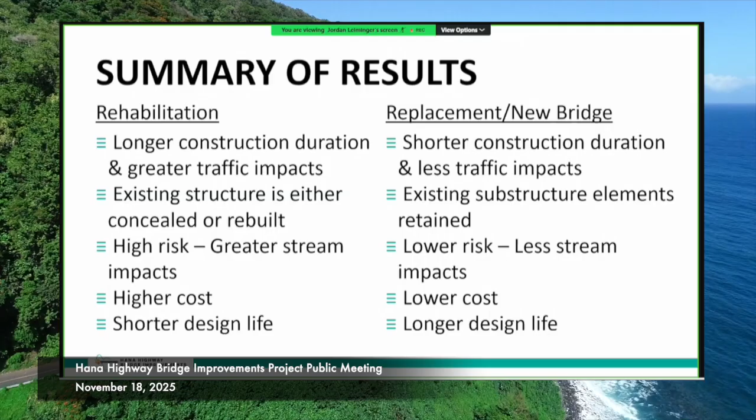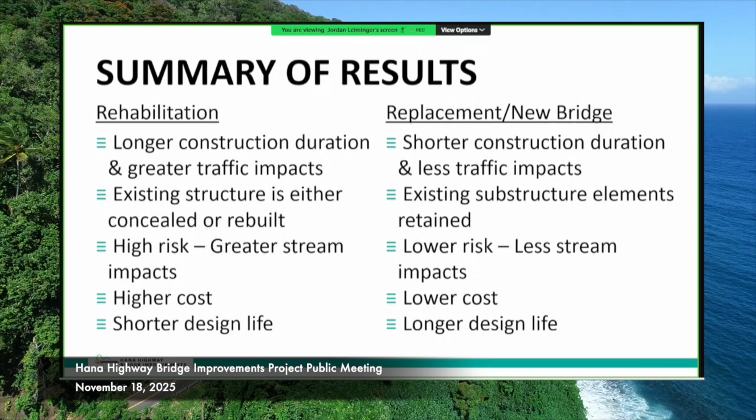Our summary of results after looking into both rehab and replacement: when we looked into rehabilitation, we found that the construction duration would be longer, the traffic impacts would be greater, the existing structure is either concealed or rebuilt, there's high risk with rehabilitation, and a shorter design life. We're trying to achieve a 75+ year design life for these bridges. So we looked at replacing the bridges instead, which allows us to keep more of the historic structure, the piers underneath and the abutments, at lower cost, lower risk, and lower impact to roadway users.

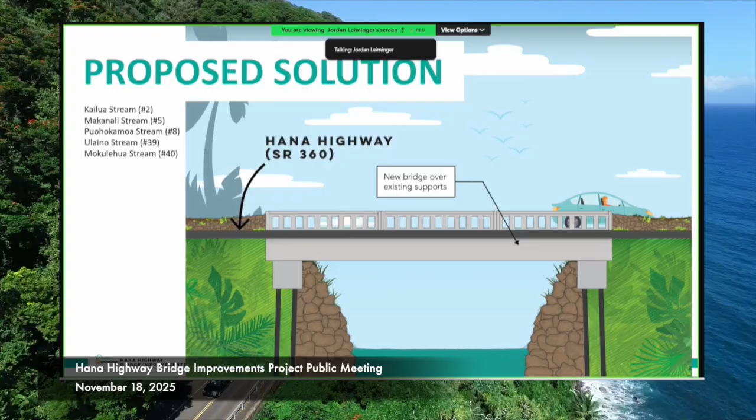I'll hand it over to Darren in a moment, but overarching our proposed solution, this is a good example of what several of our bridges look like that we're proposing. These are the CRM existing abutments and railings, and we're going to keep these similar features and just build our bridge behind them. I'll let Darren get into the design approach.

Thanks, Jordan. I'll go bridge by bridge here. I want to clarify, we spent years going over exhaustively the rehabilitation options, trying to figure out ways to keep these existing structures and somehow strengthen them up to current requirements.

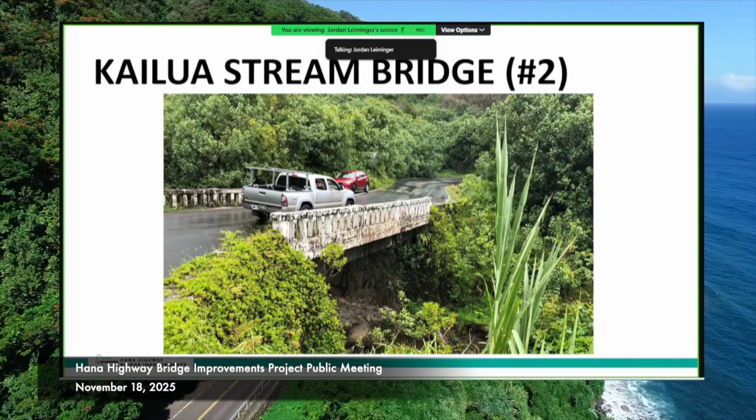Obviously those types of treatments probably aren't the best looking, and there are technical constraints in terms of cost—it's very painstaking work to implement those features. We also identified reconstruction of the abutment, because when you put a modern load on, the abutments couldn't hold that additional weight required. So we were looking at how to rebuild the foundations of the bridge anyway.

As Jordan alluded to, looking at the replacement alternatives basically checks all the boxes and requirements. We get the width of the bridge we want, a new modern railing that looks similar but is much stronger and satisfies current code requirements, and we can essentially abandon the weight on these two abutments, bridge over them, and put new foundations behind each of the new abutments. When we really thought about it, this is a lot cleaner solution than trying to painstakingly patch together the existing bridges.

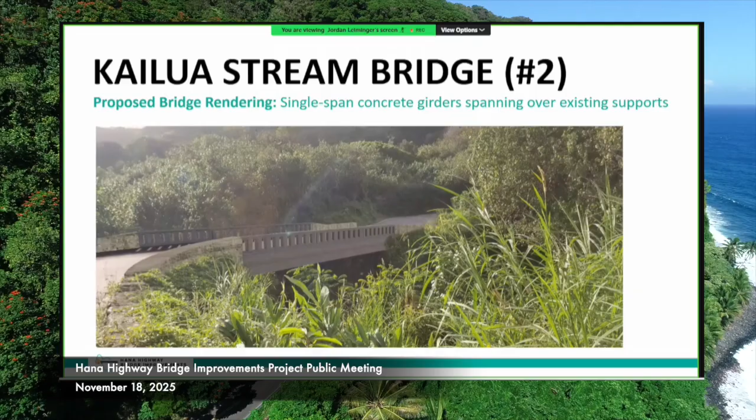Next slide. So the second bridge is the Makanali Stream Bridge, bridge number 5. The unique thing about this is it's the shortest bridge on the project—only 25 feet long.

How's it going? Okay, thank you. I appreciate it.

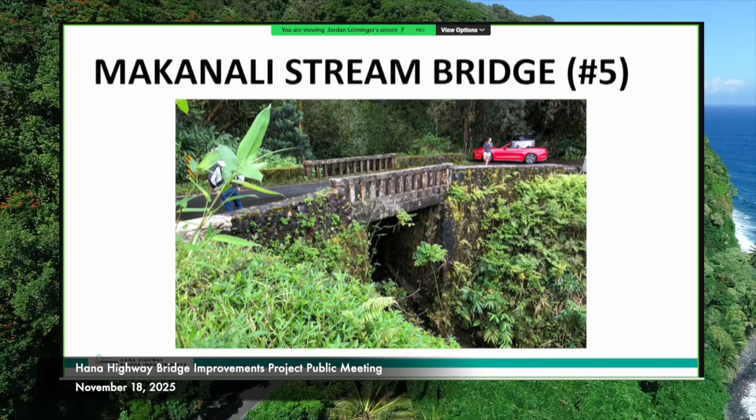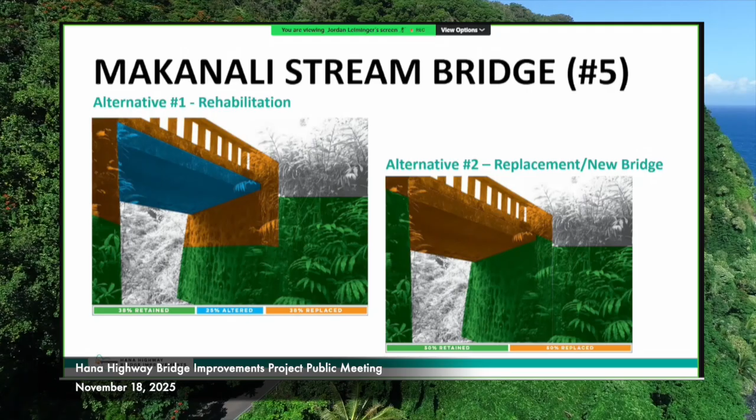So go on to the next one. Puohokamoa stream bridge. What did I do there? Okay, so this one's unique.

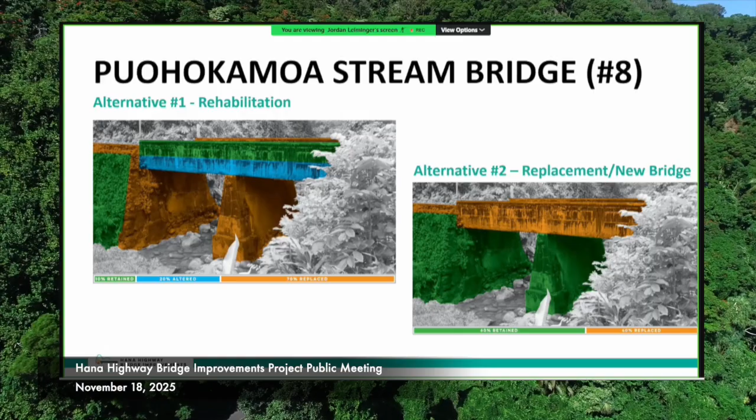Next slide. So Ulaino Stream Bridge, number 39. Is that correct? No, it's not Ulaino. What is it? That's ours, the last bridge, 40. Oh, it is? You're 40? Okay, we'll get to that one. The Ulaino Bridge 39, that's not it. That's 40. That's it, that's Ulaino. No, but what is the bridge called then? Because you live there. Makula? Is it Makula? What names? We call it... Yeah, okay, so they have it. So we're calling this Bridge 39 for now, and we'll talk.

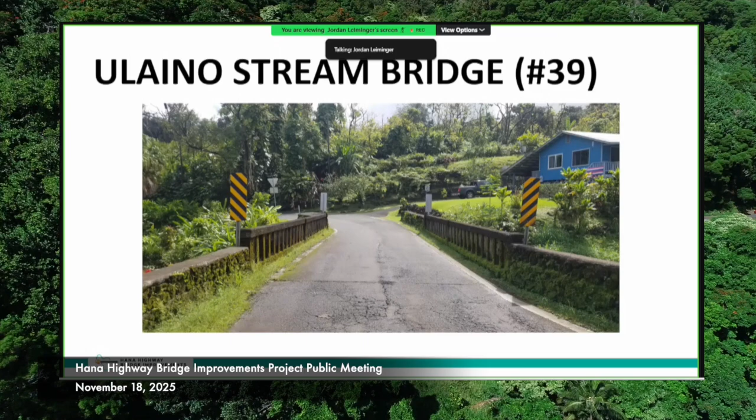You'll see a little more detail here. Let's go ahead and flip to the next slide. So here's the elevation view. Two-span bridge, historic picket railing. It's got this pier right here. For the rehabilitation options, we were even showing that this pier would have to be removed or replaced.

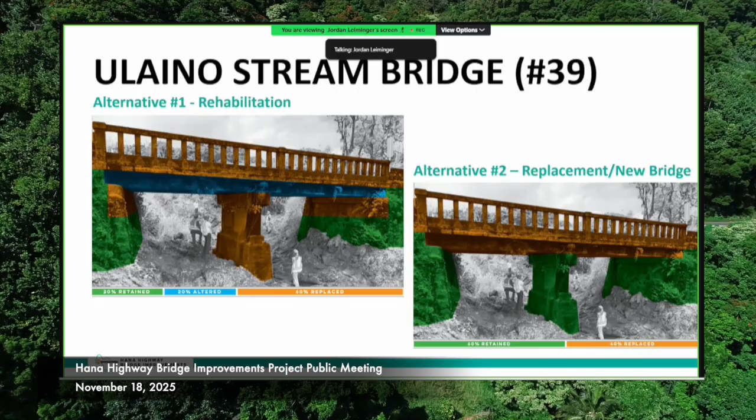So with the replacement option, again, we're just spanning over everything. The abutments remain in place. New superstructure. Go ahead and go to the next slide. So here's the rendering of what that would look like, extremely similar to the existing bridge.

Any questions on this? We'll just keep going here at 40. There's a little anticipation built up here. Mokulehua. Oh, maybe it's switched around then. Yeah, okay, we'll get that.

So Bridge 40, and there is a residence right over here. So this is the interesting thing about this. This is the oldest bridge on the entire corridor. This original bridge was built in 1908.

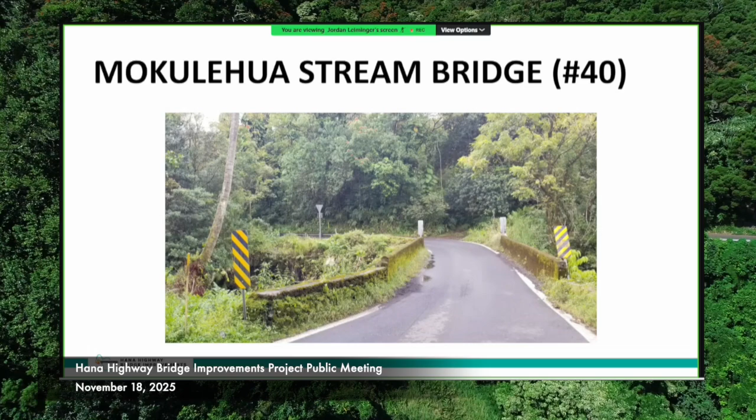If you go to the next slide, you'll see it's actually three spans. It's got these existing concrete piers, very short spans. Again, very difficult rehabilitation. Our new bridge is going to be a concrete slab that spans over these, and we're going to keep all these elements in place and just bridge right over them.

If we go to the rendering, again, very similar to existing, but it's still going to be a one-lane bridge. And yeah, so I think that's it. If we go to the next slide, I think we're okay, so this one.

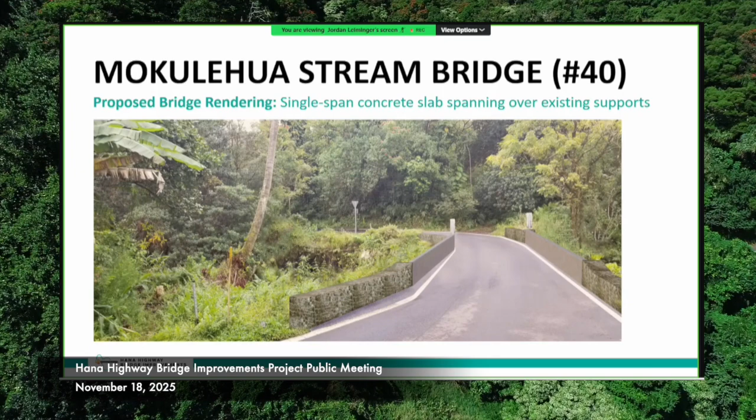This is one of the most unique sites on the whole corridor, Kopiliula Stream, it's Bridge 19. This is the one location where we're actually going to keep this existing structure exactly as is. We're not actually going to do anything to this bridge. The main reasons driving this are the historic irrigation fixtures attached to the bridge, and the historic weir structures upstream of the bridge, and those defining characteristics kind of outweighed replacing in place.

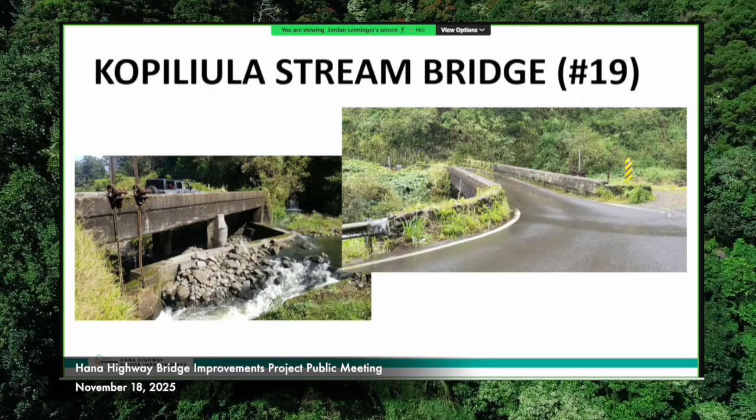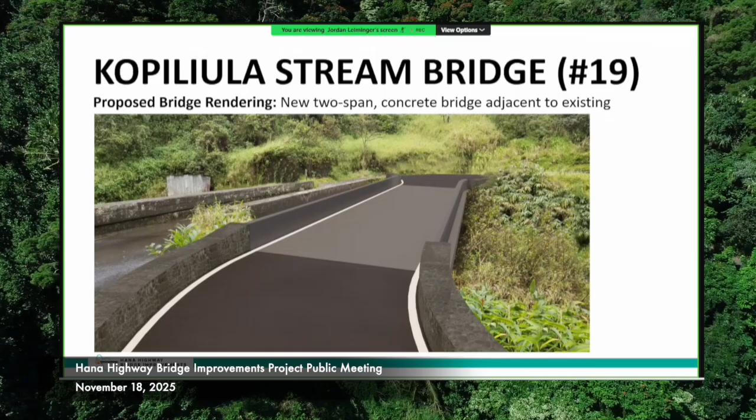Okay, I think Jordan. Yeah, thank you. All right, so now that everyone kind of saw what we're going to be doing for each of the bridges, I'm going to talk a little about the constructability and the traffic control and methods that we're looking at using. We definitely had a lot of considerations that we heard from everyone over our last public meetings.

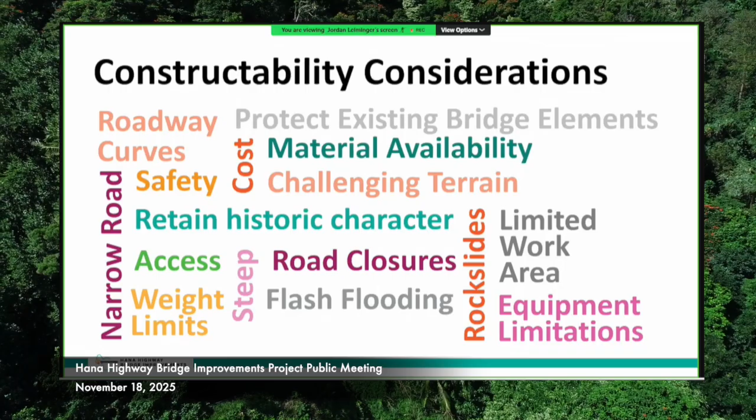Some of the big challenges are road closures, challenging terrain, narrow road limitations, retaining historic character, and weight limits and other factors we had to consider when looking at how we were going to construct these bridges.

We really wanted to make sure we have the least amount of impact to all roadway users across Hana Highway. So we initially looked at a bypass bridge, sometimes called an Acrow bridge. These are used as temporary alternatives to driving on the bridge while they're working on it, with the bypass adjacent to it.

However, when we started looking at this, we realized this isn't the best option, as it impacts users for many months to potentially many years, and it actually has a really big risk to private landowners and property owners. So we eliminated this and went toward a different accelerated bridge construction alternative.

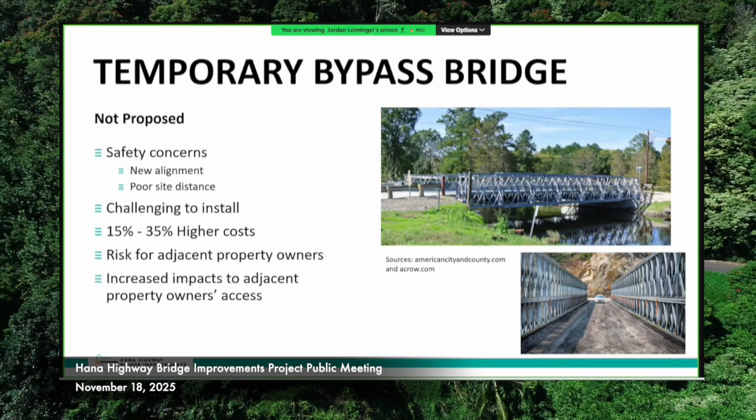Here you'll see a representation of a bridge slide, or lateral bridge slide, another word for it. These are called accelerated bridge construction techniques. This allows us to build a bridge adjacent to the existing bridge. In our case, it's going to be built downstream of 4 of the 6 bridges, and we will slide it into place over a closure window.

This allows us to have the least amount of impact to all users, as we can just have one continuous closure, and those continuous closures are going to be up to 84 hours at 5 of the 6 bridge sites. There are incentives for the contractor to finish faster than 84 hours, which we hope to see, but we do want to plan for the worst case scenario.

So it would be from 6 p.m. on Thursday evening until Monday at 6 a.m. That would happen 5 times over approximately a 3-year period.

There are also going to be plans for some overnight closures. Those happen at each bridge location and would also be communicated like a closure, but those would only be a shorter duration during the evening.

All of these types of closures are going to have to be communicated regularly with everyone. Every user of Hana Highway, it will be our role to campaign out that message through email, texting, and the project website, which the contractor doing this work will have to maintain every day. A 14-day notice minimum is required to be sent out to everyone for these closures.

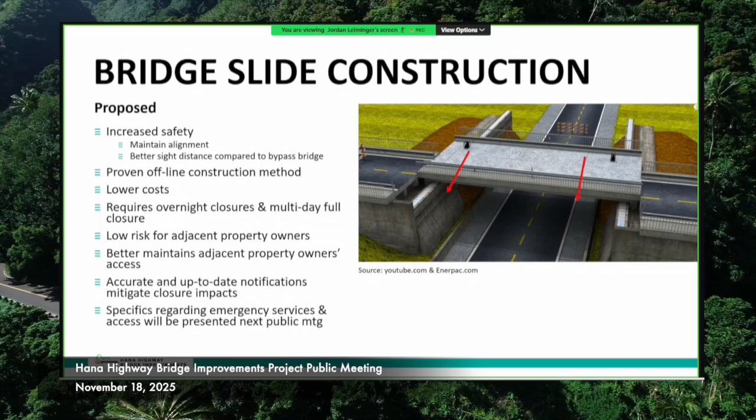I'll let Darren go into what that's going to look like with that closure window, and how we can push through and get an entire bridge in place in 84 hours with the lateral bridge slide.

I just wanted to highlight the 84-hour window for the lateral bridge slide. It's a very aggressive construction technique, and it's actually very rarely used, just because it's so aggressive. Generally, contractors don't like to go really fast, so it's kind of a premium to make the contractor go very fast and do a lot of work in a small amount of time. But as Jordan mentioned, 4 of the bridge sites are going to have this lateral bridge slide technique.

I'll just step everybody through what that's going to look like. The initial work is that when the contractor arrives at the site, some of the first things you'll start seeing at each site is a traffic diversion barrier, pushing traffic over to the far side of the road. Then you'll see the contractor coming in and staging these work areas, with some clearing and maybe some minor rock work to get everything set. These are going to be the work areas that the contractor will be working in.

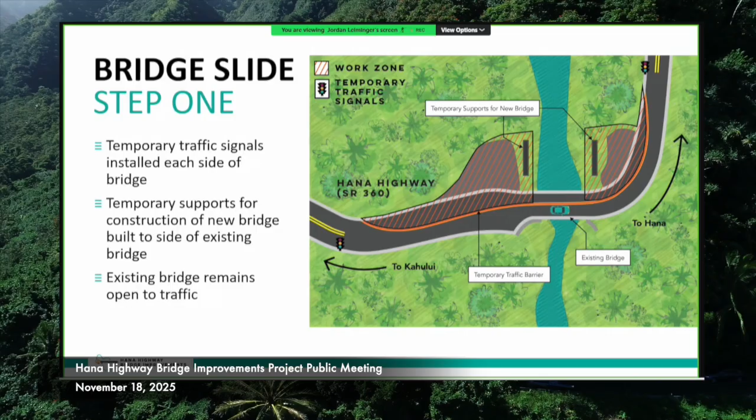When the road is open to traffic, traffic will be able to flow through here. We've got some temporary signals here. The contractor will be able to work behind these barriers during the day.

Next slide. So step two of this bridge slide process: you'll start seeing a bridge being constructed off to the side. It'll be kind of strange looking, but it'll just be a brand new bridge being built off to the side of the bridge site.

While this is happening, these orange rectangles represent construction taking place during nighttime closures. This method is called cut and cover. The contractor can go in when the road is closed and cut a trench into the roadway to construct the future foundations for the new bridge.

When the closure is over in the morning, the contractor will cover these excavations with structural lids that cars will actually be able to drive over. So we can reopen the roadway to traffic, they'll drive over these covers, and the construction will be underneath. Then when the next nighttime closure happens, the contractor removes the covers and continues working.

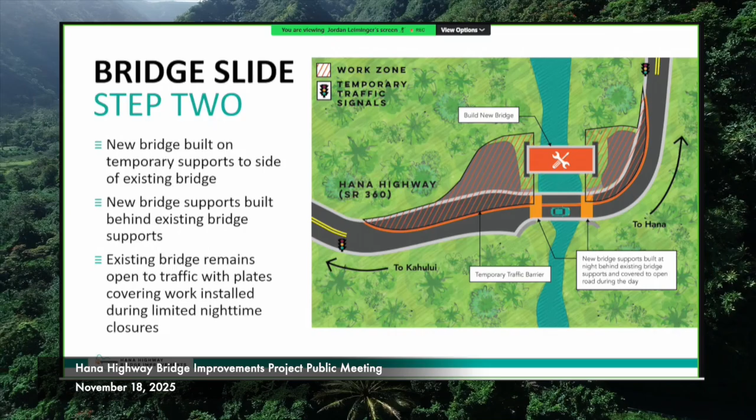Next slide, please. So you can see the hatching now, the temporary barrier is gone, and now the whole site is hatched. This represents the beginning of the full closure, that 84-hour closure that Jordan was referring to. The first step is the contractor is going to demo the existing bridge.

It's going to be done in a very careful fashion with netting to prevent any debris from going into the streams. That's a very important point that we're going to have the contractor do. Once the bridge is demoed, we basically expose the proposed new abutments here.

It's not actually shown here, but there's a trackway that the bridge is going to slide on. I think that first slide showed the trackway. The trackway connects up to the abutments, and then the actual bridge slide happens within the 84-hour full closure.

The actual slide itself should only take 2 to 3 hours. It doesn't take very long. Everything leading up to it is what really takes a long time.

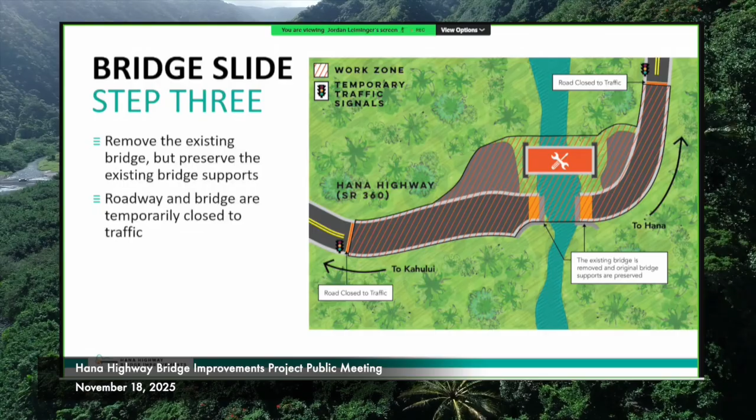So we go to the next slide. The bridge gets slid into place, and then hydraulic jacks lower it down onto its final bearing locations. Once it's set down on the bearings, that's the final position of the bridge. It's set in place. Then the contractor can come in and backfill behind these abutments, bring up the subgrade.

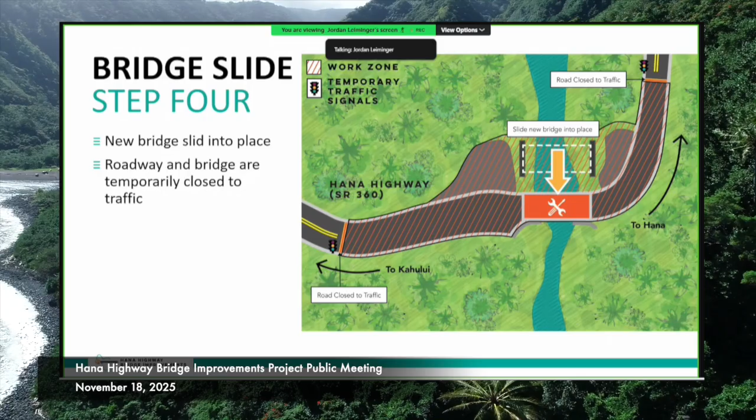Bring up the subgrade to basically just below the pavement elevation, put the final pavement in, approach slabs, and then we go to the next slide.

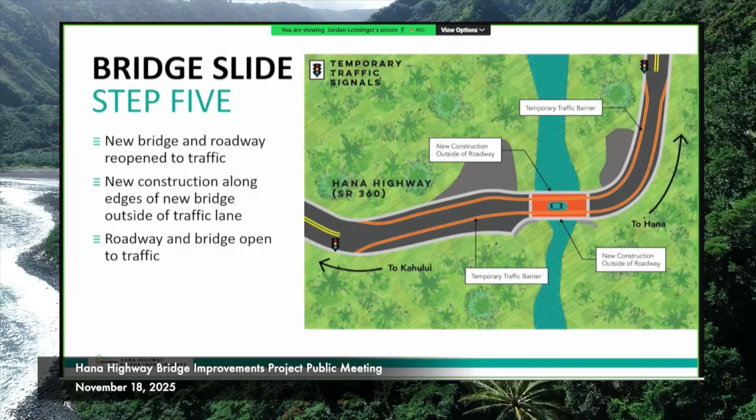He doesn't have to get all of the work done in the full closure. Some of the approach barrier work, we expect that to happen outside of the full closures. But what we can do once the full closure is lifted is put temporary barriers in that keep us safe. Then traffic can proceed to drive on the brand new bridge with temporary barriers in place.

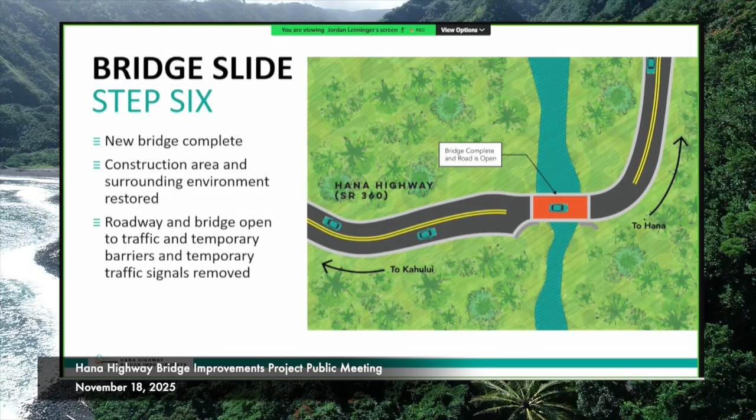And then the final slide: temporary barriers are gone, the new approach guardrails are installed, and the contractor is going to restore the work areas he is working in. This would represent the completed, finished project.

I think that's it. Right, and Tom, you talk schedule? So, over the next couple of months, we're anticipating finishing up the design phase of this project. We're hoping to wrap it up by February of next year, 2026.

We are looking at advertising the project for bids in the spring of 2026. That is pending the acquisition of the temporary construction easements required for construction of this project and obtaining the approvals on the environmental permits that we are currently working on obtaining.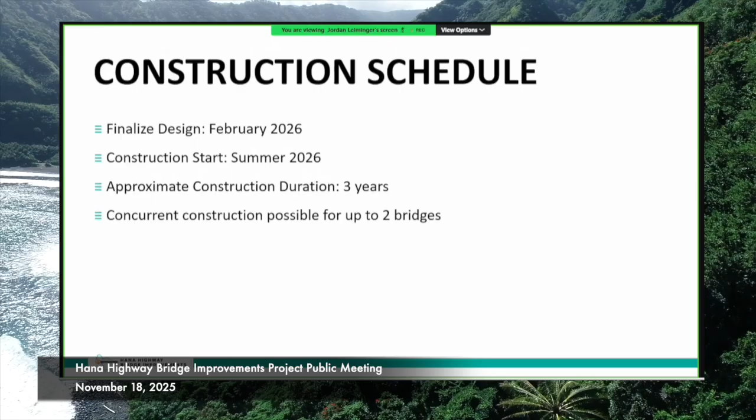We are anticipating construction of this project taking about 3 years. With 6 bridges and the location of those bridges along Hana Highway, we're anticipating that the contractor will be able to build 2 bridges per year for the total construction of 3 years.

Now, I just want to make sure that everybody's aware of this. This is our estimate, and that's how we develop our contract. But it will be up to the contractor to really suggest the methods that they're planning on using and the proposed construction schedule that will be submitted to us for our review and approval.

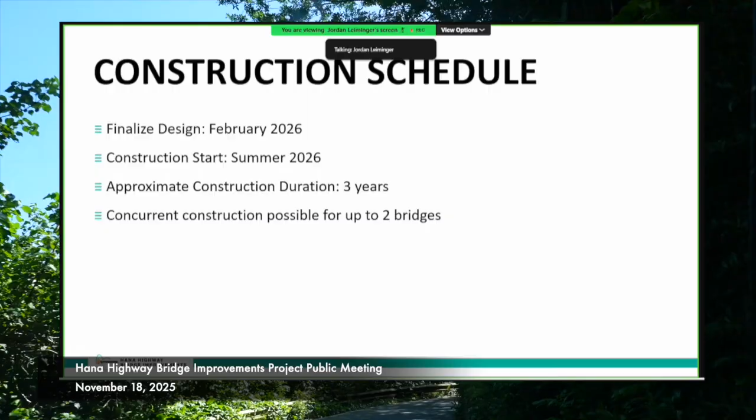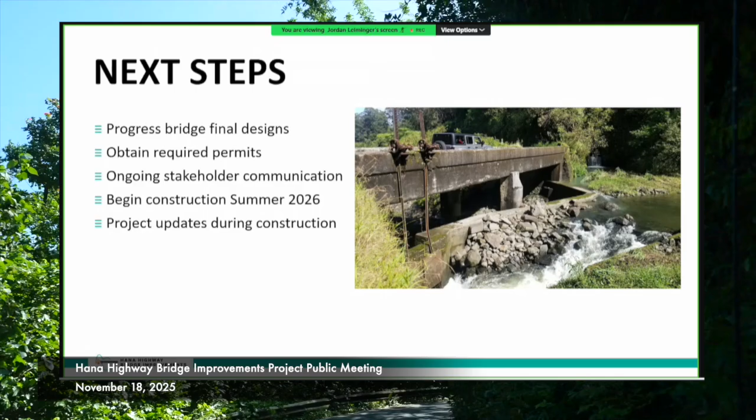Next slide, please. So a couple of next steps: like I mentioned, over the next couple of months we'll be wrapping up the design phase, preparing the procurement documentation in an effort to get this project advertised and under construction in the summer of 2026. A couple of important messages that we want to deliver to you and make sure that we have your engagement as this project is going into construction. Next slide, please.

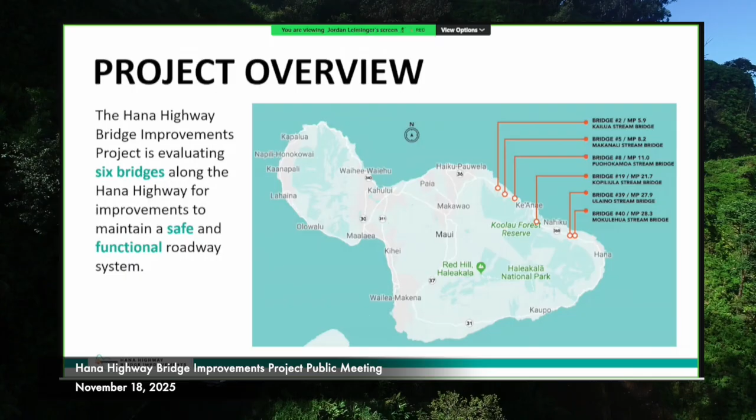One of the problems is it's one-lane roads in both directions, and regularly tourists especially refuse to yield, so there's major traffic jams, especially if you get a big truck. So for the stoplight here, it's going to have to be about a quarter mile.

And this curve is a little softer now, so hopefully that creates a bit more space there, because the barrier will be here blocking off this bridge. We're not changing that line. Would you still be able to walk across the whole bridge? Yeah, correct, that's encouraged.

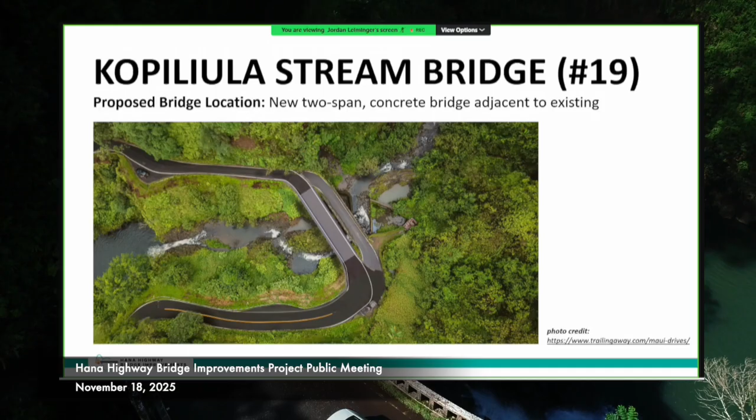I'm glad you're looking at not just the typical contract to get federal money. Last time they made it a millennium trail and we got a lot of federal money, but a lot of the pullouts that used to let traffic move through got covered up because they were required to put steel barriers there, covering those pullouts. And their signs, a forest of signs - where you used to have a yield sign for the person at both ends of the bridge, which is totally confusing. So I'm glad you're looking at this, given what federal highway requires for the state of Hawaii.

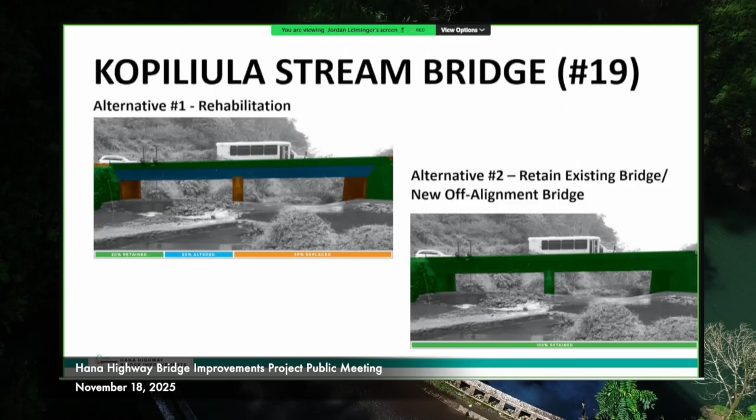Trying to match a couple things, or answer your question, Matt? Sure, and we can chat more in detail after this Q&A. But long story short, we're trying to retain those features.

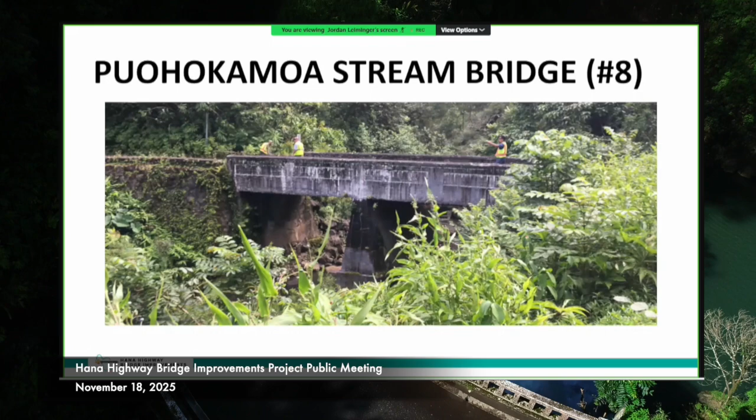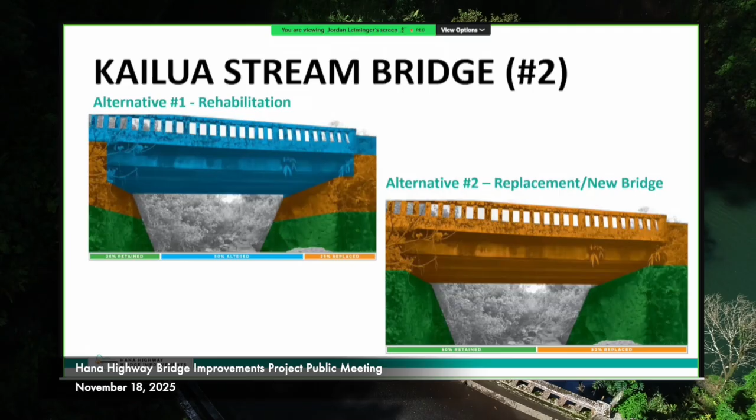But when you mention the word replacement, that's a whole different category than restoration or reconstruction. Absolutely, yes, so you do have different standards for Secretary of the Interior's Standards rehabilitation and preservation. What we're doing, I would say, is rehabilitation, although it's not exactly one-for-one with bridges. We're replacing parts of it with in-kind materials and trying to stay with a similar design. So the railings, we're trying on each individual bridge, since different bridges have different railing details, to keep that on the replacement structure, but then also retaining things like the rock wall abutments, the rock wall approaches, and barriers, so that it still has the same continuity with the rest of the building.

Is this the same bridges we went over maybe six years ago? Probably, yes, I think these were the same bridges we worked with for a while. They went over all these things, so it required community input. This is the fourth public meeting, because you guys kept coming for a while. So we were taking on public comments about how we could treat this, how we could make the closure time shorter, things like that.

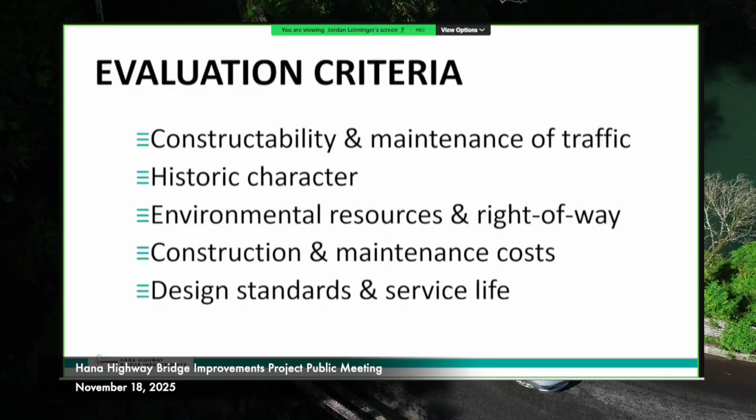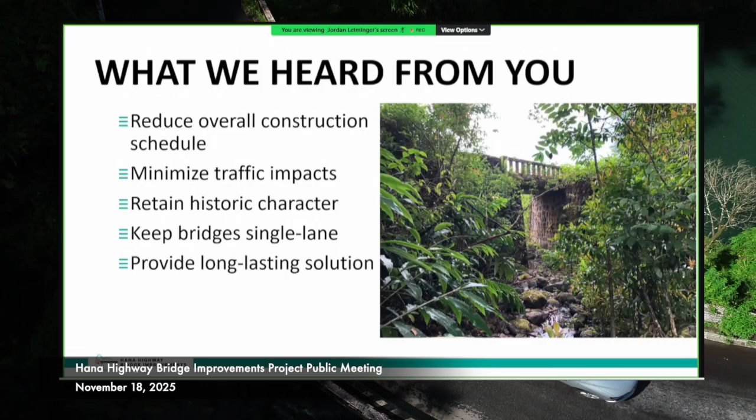I'm just asking because I think we went over a lot of good stuff already. Yeah, and I think probably these slides are very similar to the ones we had in the public meetings held virtually in 2021. Although the slides are fairly similar, our design has advanced drastically since the last time you saw them. So I hope that came through, in addition to consulting with the community, the state, the feds, and everybody else. Somebody needs to be talking to the county, because whatever they do on the county road affects state highway traffic and vice versa.

I think what we will do on the approach is make sure that issue is addressed, because when we drove the bridges yesterday, there were definitely overlays of several inches on one side of the bridge that weren't on the other. So there's a lot of extra pavement on the bridges that maybe shouldn't be there. But once these bridges are replaced, I think those issues will be addressed.

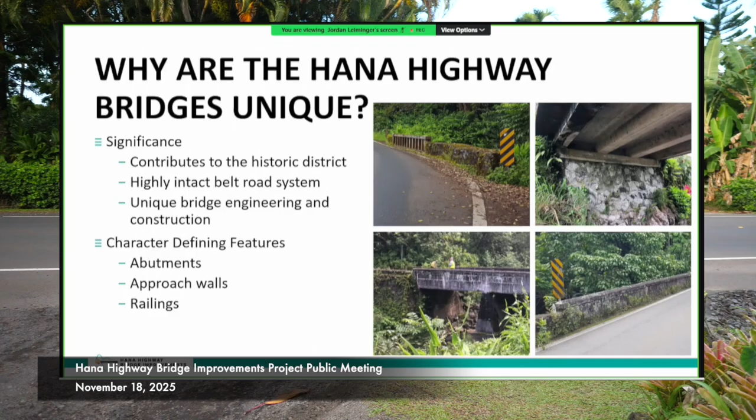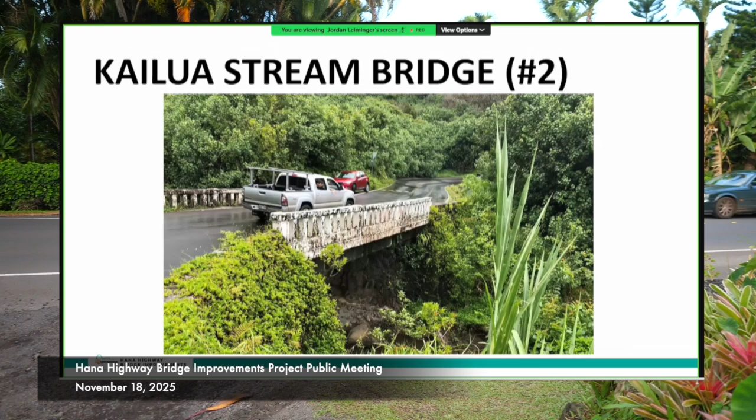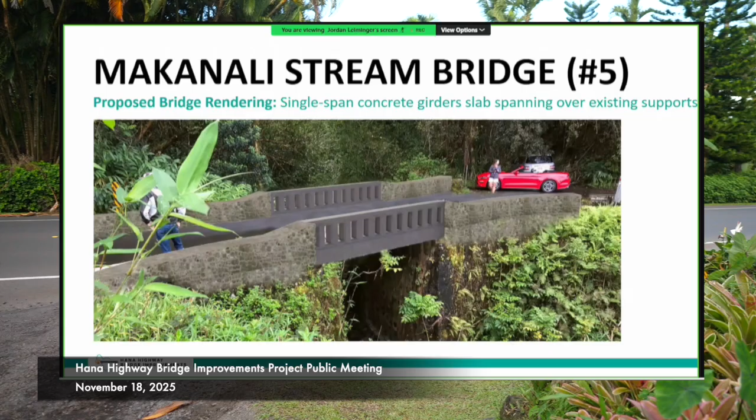Are you still going through with the property on the Kahului side of the bridge? Are you guys still going to grade about 25 feet into her property? We're going to the bridge, I just wasn't sure if there was anything there. We'll make sure—I think I know what you're talking about. So right now we're looking at a temporary construction easement into that area, slightly out, about 25 feet or so. We anticipate that area won't be super disturbed, probably just for staging of equipment, but yes it will be on this side, and that's currently being negotiated with HDOT, so they'll be in contact with all of you on that.

Okay, or what do you mean? Christie, okay sorry—so you own that area up on this side. Okay, that's great, you've got your contact information here. Sarah, all right, we'll get in touch with you and talk through what we're looking at—it's a small sliver though. And the actual decision on my mailbox, I think we talked about it yesterday morning.

Right here, yep. And the hibiscus, the rare hibiscus—yep. And that's not going to be messed with, right? Yep, we're going to be able to keep it. Thank you, thank you.

There's another consideration: if there's a staging area with equipment overnight, in the last construction project they actually had somebody there all night watching the equipment, because depending on what you have there, some people on the island will mess with things down the road when nobody's there. So you might want to consider having a guard. That's good to know, thank you for pointing it out. Ultimately it will be up to the contractor on how they want to protect their equipment when it's staged there, but thank you for pointing it out.

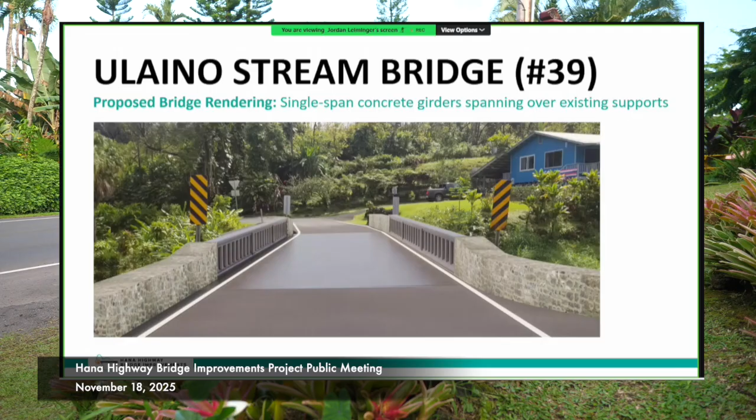Has there been communication with the HDOT base yard at Kahului? We've been coordinating with the Maui district quite a bit during this project, and we'll continue to do so for the remainder of the design phase and construction.